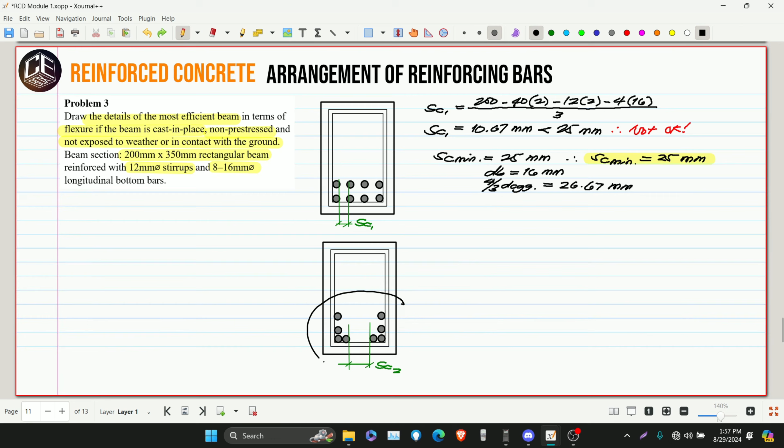So, solve natin ang SC2. Before that, i-solve natin yung minimum clear spacing based on this type of arrangement. So, i-solve natin yung diameter or equivalent diameter ng bundled bars natin. So this is, tanggalin natin pi over 4, magka-cancel out lang din naman. So this is 16 squared multiplied by 3, equivalent to d squared. So therefore, ang ating d is 16 squared multiplied by 3, then square root. So this is equivalent to 27.71 millimeters. Kaya, yung ating SC minimum is equivalent to 25 millimeters. Same na same lang dito. Ang pinagkaiba nga lang dito is itong diameter ng bar, which is equivalent to 27.71 na.

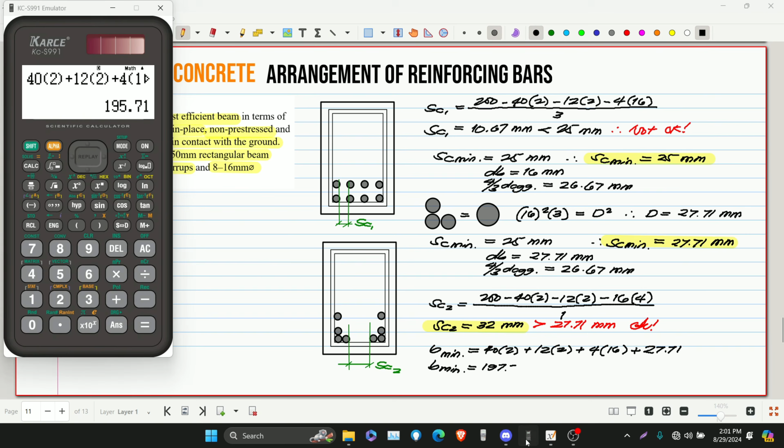Ngayon, kung gusto nyo i-solve yung minimum width based on this arrangement, so that is equivalent to 40 times 2 plus 12 multiplied by 2, then plus 4 multiplied by 16, then plus yung ating minimum clear spacing, which is equivalent to 27.71. So, ito yung ating minimum width for the beam. 40 times 2 plus 12 times 2 plus 4 times 16, then plus 27.71. So this is 195.71 millimeters. O diba, ang simple-simple lang naman ng pag-solve ng arrangement ng reinforcing bar and also yung pag-solve ng minimum width ng isang rectangular beam.